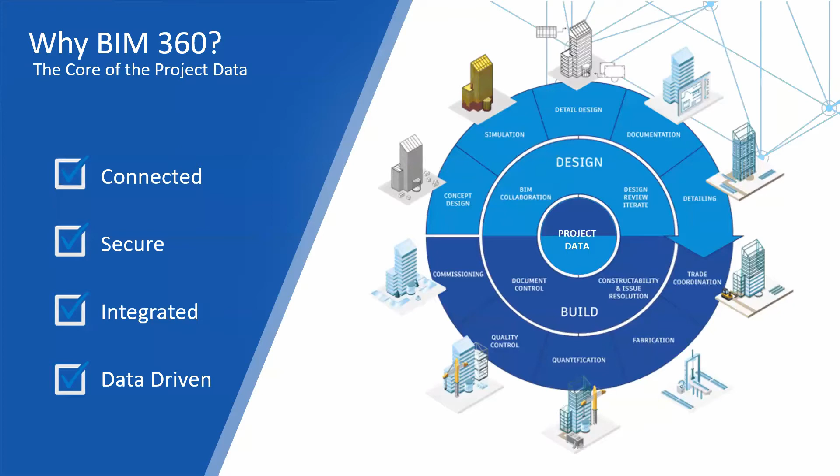As you can see on screen, it's a good representation of the BIM 360 ecosystem. Everything basically works off and is pinned on Autodesk Forge. That's a proprietary programming and coding language that all of the platforms have basically been redesigned from the bottom up to allow integration between the different BIM 360 products. On top of that base, that foundation, sits your data. All of your project data, your communications, all of that is basically going to be set in that central repository with which everything is going to be able to access it from.

So data silos are basically, as much as they can be, a thing of the past, and all of your BIM 360 platforms will basically work off of BIM 360 Docs. So as you can see, you've got your design and your pre-construction, which is what we're going to be discussing today, and that is going to be pulling the required information from the same data. Also connected to that is your ops and field execution software, BIM 360 Field and BIM 360 Ops.

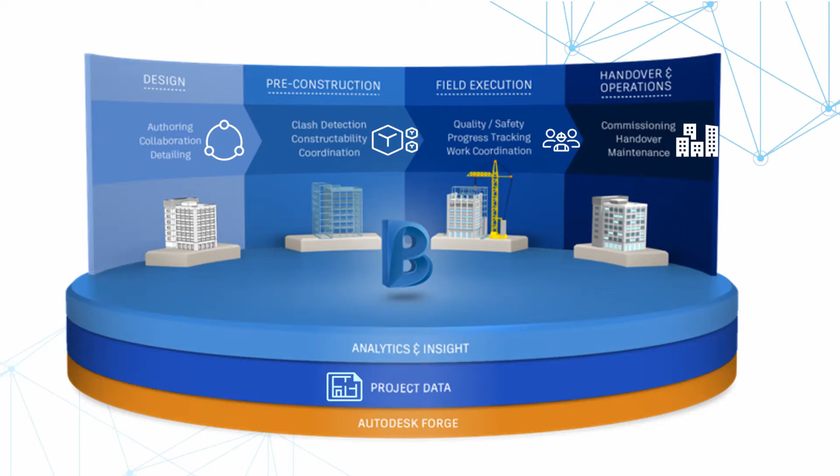Another graphic basically showing where it sits in the ecosystem. So as you can see, in terms of administration, BIM 360 Docs is the basis. Everything else ties into that, and we basically have all of our project access, your member access, your member administration, and your project administration, as well as account admin, handled through BIM 360 Docs.

BIM 360 Coordinate will basically handle your verification of your authored models, which would have been done by BIM 360 Design. So it'll basically interrogate those models vis-a-vis clash detection and work off of the same data.

That then feeds back to BIM 360 Docs to get you your insights and your project home, putting you in a position where it can feed you project-specific insights. As you move further down the road with BIM 360 over the years, all of your projects feed into a business level insight, which is always valuable. As opposed to what currently happens, your project data, once the project is finished, literally sits on the server just in case you need it at some point in the future.

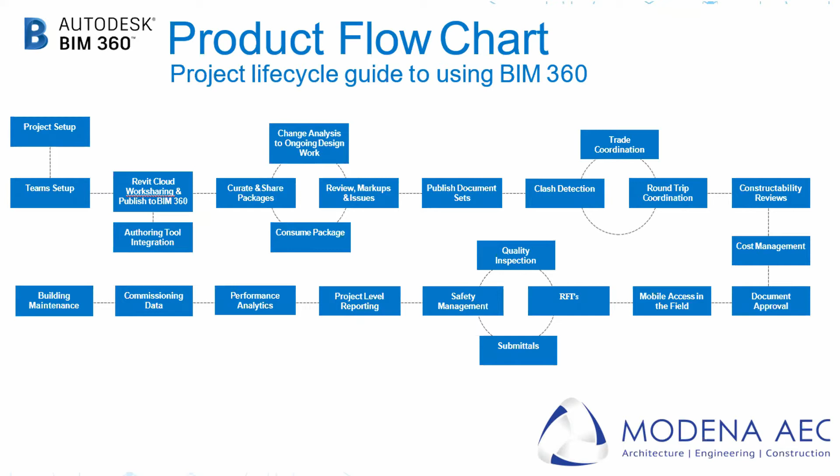This is basically an overall high-level indication of the product flowchart life cycle for BIM 360. So trade coordination sits somewhere here, and your design authoring using collaboration sits here and feeds in. In terms of your 3D model, for service coordination and clash detection, we obviously need to deal with the 3D model, 2D models and 2D drawings basically fall by the wayside. Up at the top right, all of your platforms are going to feed into your capabilities to service the project to the best of your ability.

And again, BIM 360 Coordinate will basically service you in this area here, as well as your trade coordination, your clash detection, that sort of thing.

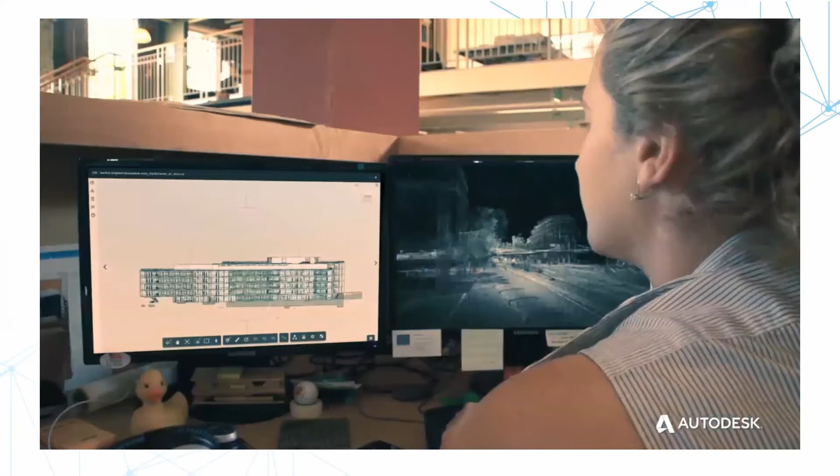Today's design and construction projects require disparate teams to collaborate closely so they can complete projects on time and on budget. But with distinct teams come data silos and disconnected communication. Autodesk BIM 360 removes these barriers with a single platform that connects design and construction processes and project teams in one place. BIM 360 Coordinate speeds the coordination process between contractors, designers, fabricators, and trades so they can identify and resolve problems between participants before construction begins, saving time and money.

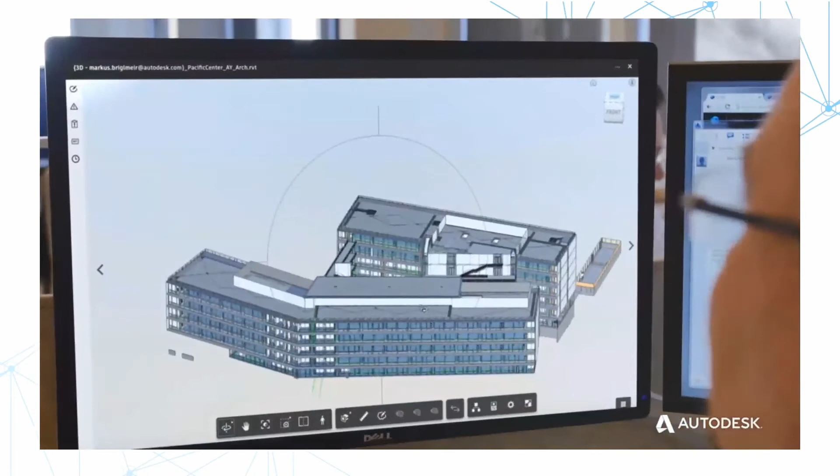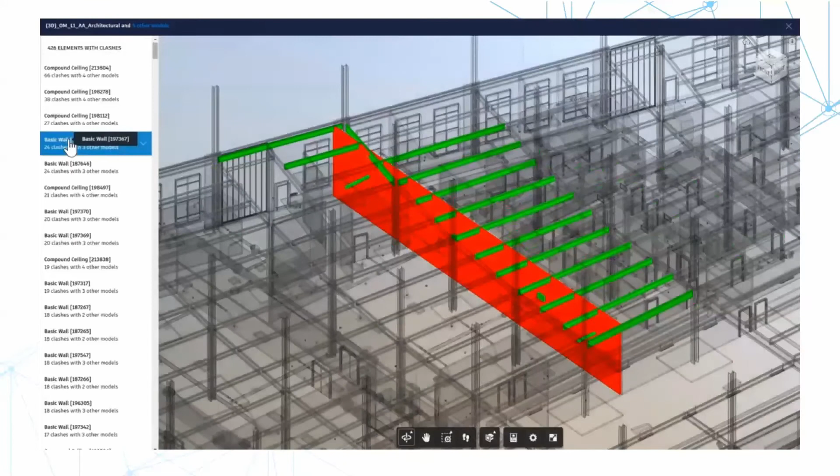With BIM 360 Coordinate, teams can merge models in the cloud to accelerate constructability reviews on and off the job site, navigate aggregated models, and toggle visibility to hide and reveal model components. Get clash results immediately when new model versions are published and drill down to clash details. Create issues from relevant clashes or tag clashes as not issues and assign reviewers to improve visibility into what issues need attention quickly. Create multiple coordination spaces to encourage design and trade partners to experiment with options and develop their work-in-progress models while clash checking them against models shared by other teams.

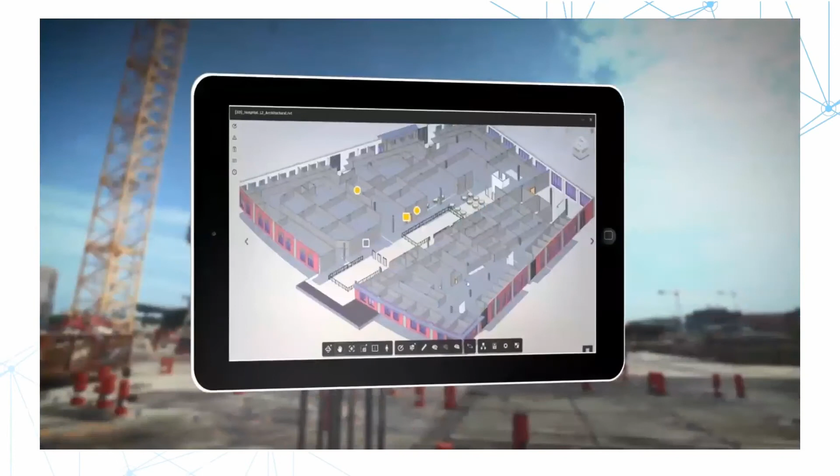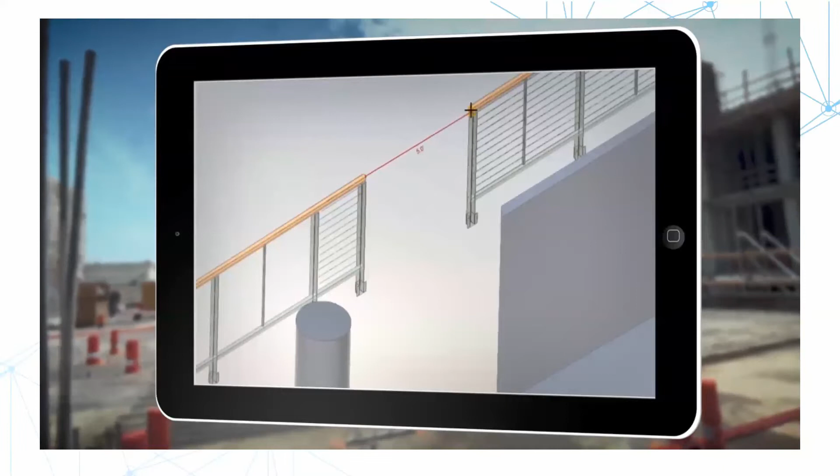With the support of more than 60 file types, including IFC files and offline model viewing, team members have access in the field to needed information on their mobile device. Coordination is put into the hands of the entire project team, democratizing specialized tasks and letting multidisciplined teams take responsibility for the quality and accuracy of their content in real time.

BIM 360 Coordinate is part of Autodesk BIM 360, the only cloud platform that connects design and construction teams, processes, and data to inform decision-making, improve outcomes, and accelerate project delivery. Experience the power of a connected project. Try BIM 360 today.

Okay, so I thought I'd put this in. Not many people are aware of some of the numbers out there, and some of it's actually kind of scary. With respect to service coordination, why it's so important, a little bit of Googling and you'll see that fewer than 1 in 3 contractors, that's 30%, believe that they finish projects on time and within budget.

In the US, they have the ability to do this kind of statistics. Over $15 billion a year is spent on rework. That's a big chunk of money.

Costs that would contribute to that include things like labor, and one that a lot of people, myself included, often forget, the plant required. You need cranes, you've got to move them, that sort of stuff. Materials that are ripped out and the materials that need to be replaced also obviously cost money, as well as time spent going through these clashes. That's obviously time lost, time you could be spending doing other things.

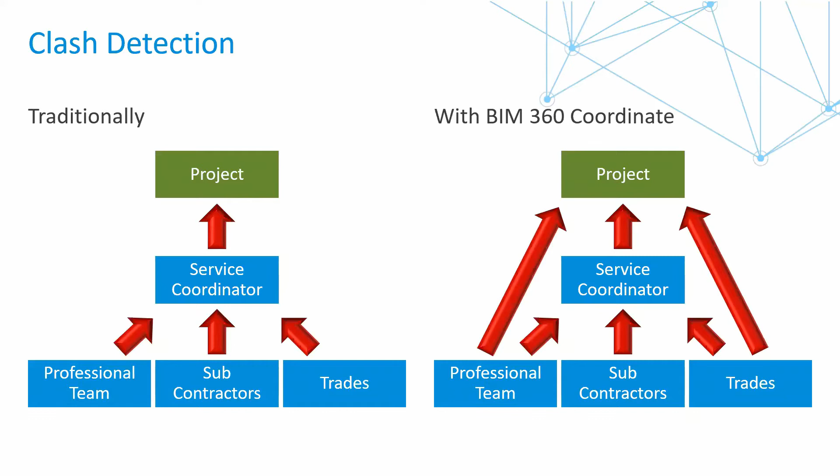All right, so we're going to take a couple of videos here. With respect to general navigation, as you can see here, what I'm doing in Revit is making a change—fixing a clash. Can you imagine maybe a duct or something goes through there? I've chosen to do an opening because it's a lot easier to see.

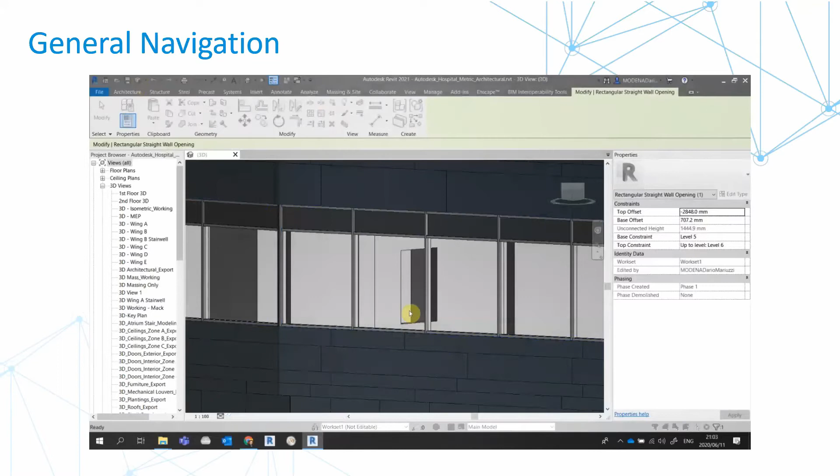You're able to basically look at a clash, eventually make the change, and then synchronize it back. In terms of how BIM 360 Coordinate is used, you can basically use it in various numbers of ways. In this case, I've chosen to clash the work-in-progress models, so from day one I'm able to clash those. You're also able to clash models that are put up for review—if a model is approved for public use, you can go ahead and clash those.

The process that you follow is slightly different, but not all that much, so it puts you in a position to be able to do this quite easily. I'm doing the little bits and pieces in Revit that I need to do right here, and waiting for that to be pushed up to the cloud.

Again, this is cloud-based—it is centrally located data, which basically means once it's up there, anybody who's been given permission can access it. So from a security standpoint, prying eyes are a thing of the past. Permissions need to be set up.

Over here you can see I'm in BIM 360 Documents. You saw there that the architecture model's basically just running through its updates—it's pushing the data through, refreshing it for me, and putting me in a position where I can now eventually access that data and start looking at the progress of my clashes.

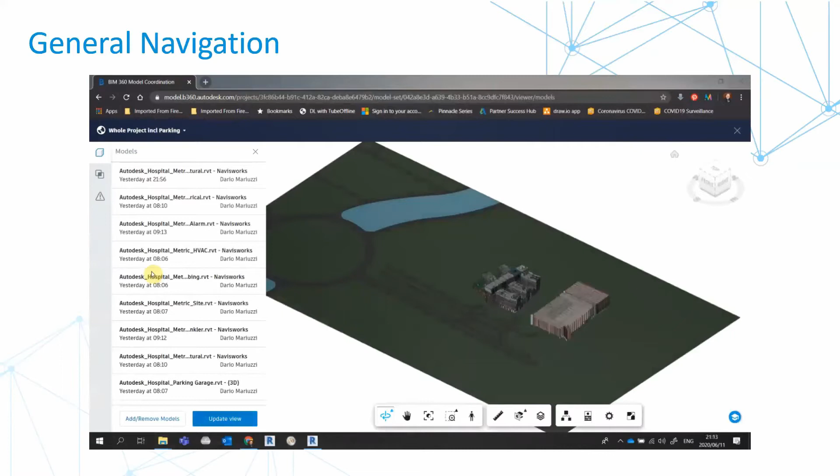So you can see all of my models on the left there. If I need to, I can go and remove a couple—maybe I added one or two extra. Easy enough to get through. Again, I'm not deleting them, I'm just basically not using them for the purposes of clash detection.

Notice how smooth the interface is—it's a 3D model that I'm navigating through a web browser, mind you, so no special software. If you were looking at a model like that in Revit to that level, you'd need a pretty decent machine. I can have any machine that has internet access and basically take a look at that 3D model.

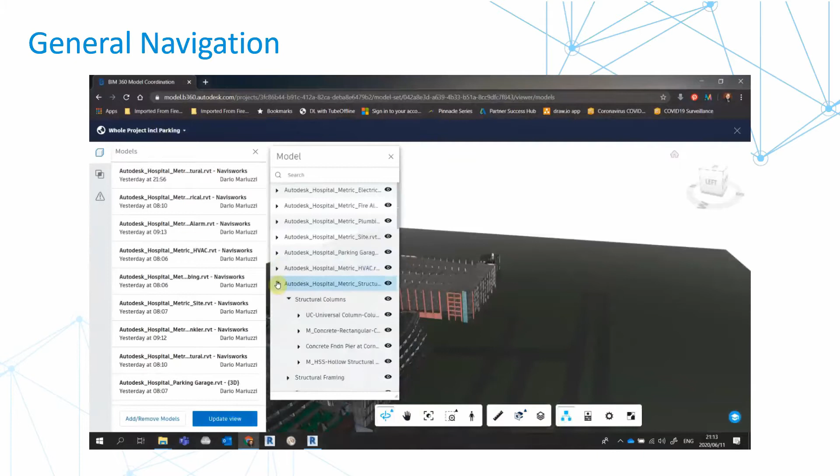Federated 3D model, that's every service. I'm able to basically look at getting things that I don't need in terms of my view out of the way. So you can see I've drilled down to basically just the models. From a model standpoint, I've chosen to hide the parking garage that you see.

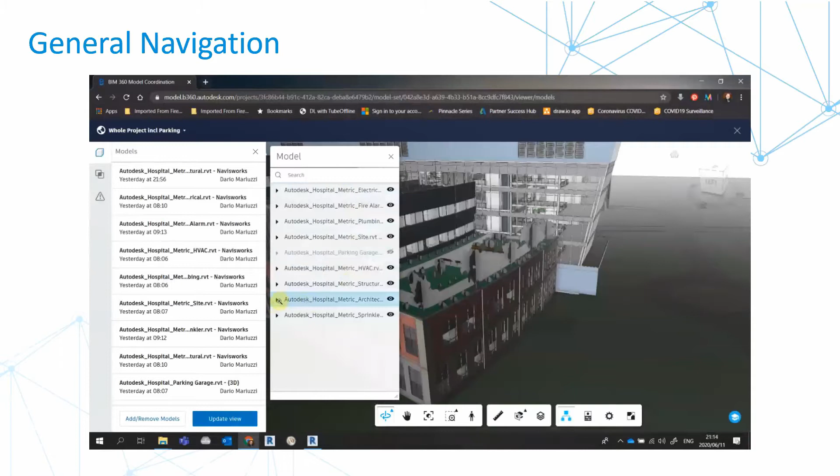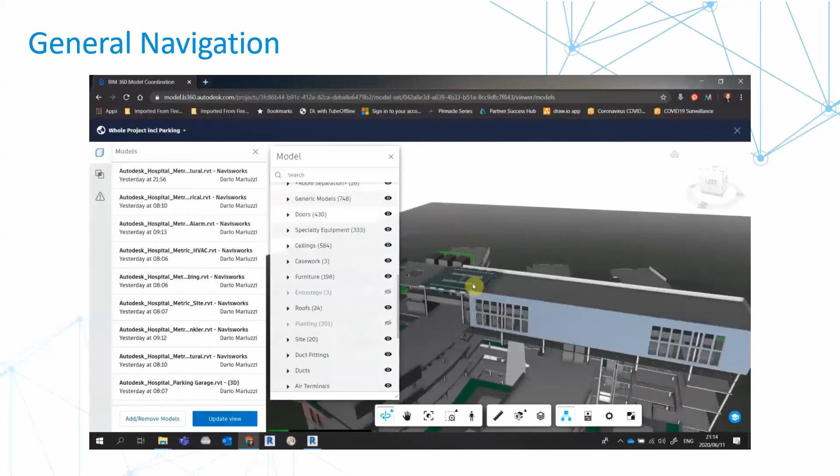It ghosts it, which is quite nice because I get to still view it in context. In terms of service coordination, all of our trees and entourage, that might not be something we need to take a look at, so I'm gonna switch them off. I'm able to switch off at a model level, hide things at a category level as far as Revit's concerned, and hide things at an element level should I choose to do so as well, which is quite nice. So there goes all of my entourage helicopters I don't need for service coordination at this point.

Notice how smooth the orbiting is. I'm able to orbit, take top-down views, exactly what I was able to do in Revit, in AutoCAD, pretty much working the same way. You can see there all of my ducting in my ceiling spaces are there. I'm able to grab elements and do what I need to with them.

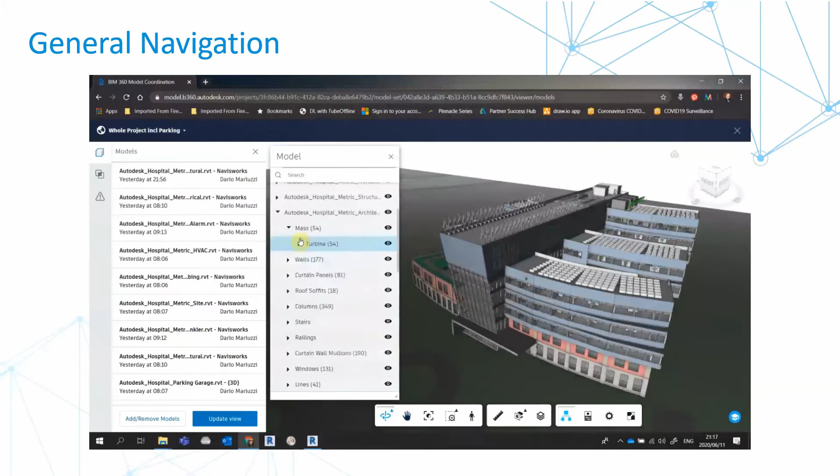Very, very fluid, very, very responsive. Now, the reason I've asked you to take note of that is our mobile devices are going to be brought into play a little bit later on.

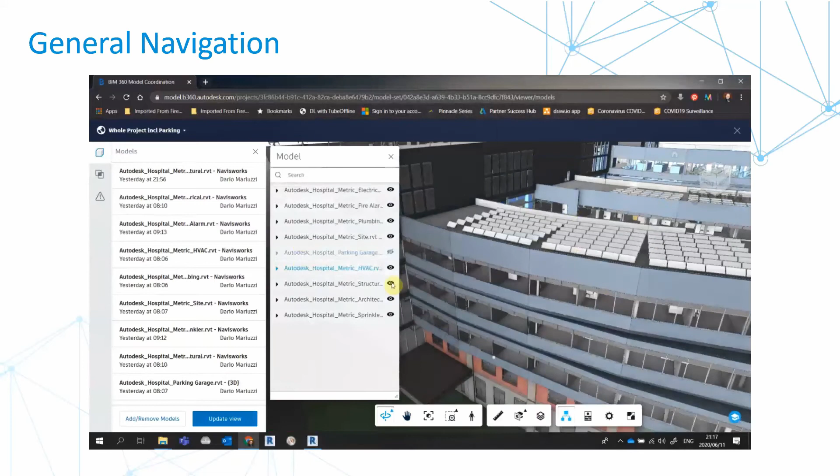Highlighting a model allows you to look at it, so you'll see the model as you pan in and out in context. So you'll see the structural model, you take a look - there's the structural, and immediately it refreshes with everything else around it, basically putting me in a position where I can quite rapidly, quite easily view things in context.

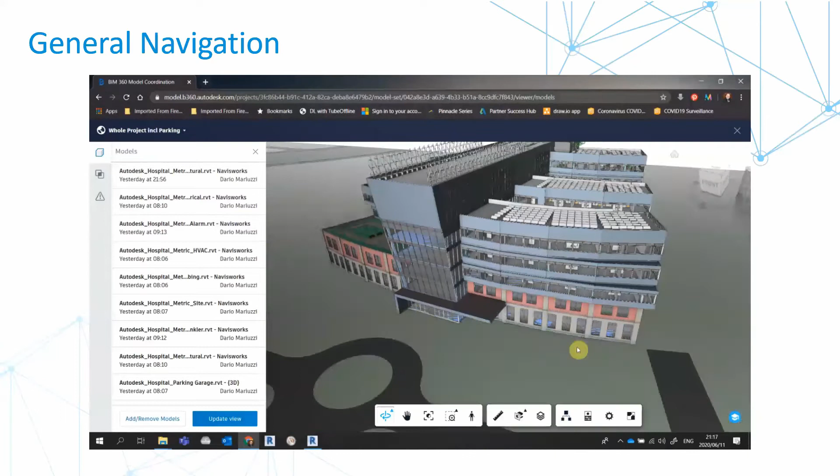In terms of navigation as well, a whole building gets kind of difficult, so common practice here, we might decide to go level by level. And what's nice is as I hover over my levels...

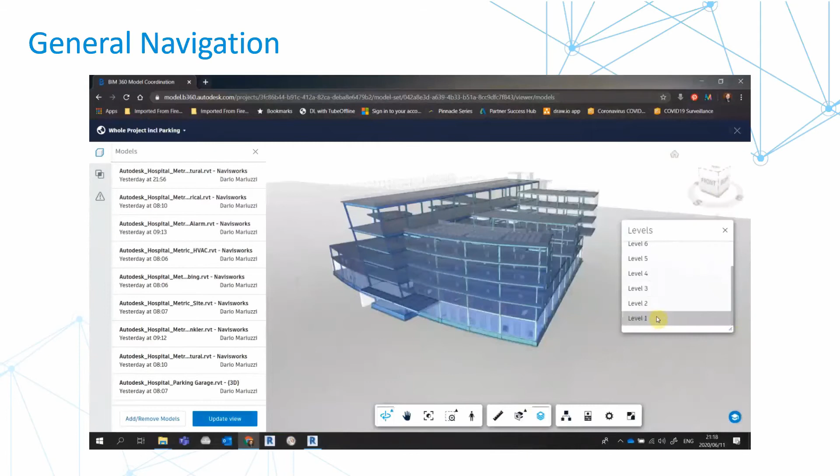You'll see that it actually gives me an indication of roughly where I am. So before I make the selection, which as you can see will basically drill down to that level, you can actually view your project level by level should you need to, and then of course navigate in and do what you need to do.

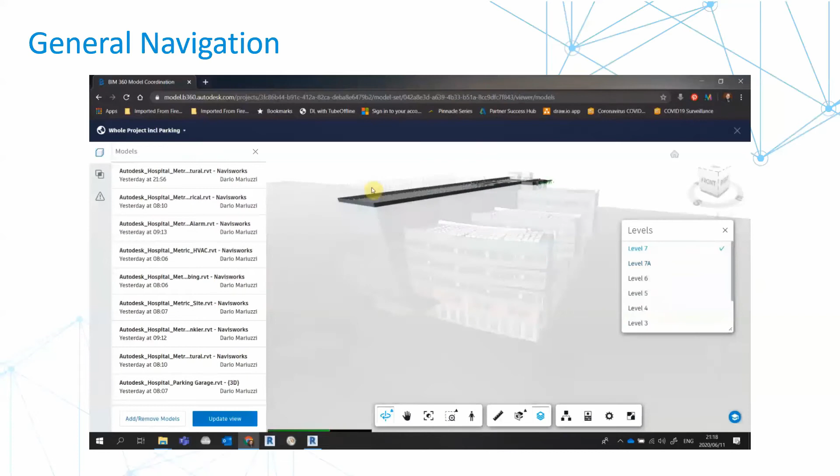Okay, so it highlights that. If I move off that little toggle there, see eventually it'll disappear to show you just that. So again, I've got my context and then it basically removes it from sight. Individual element selection is of course paramount - I need to be able to figure out what things are, which we'll demonstrate in a couple of seconds. But again, very, very fluid, okay?

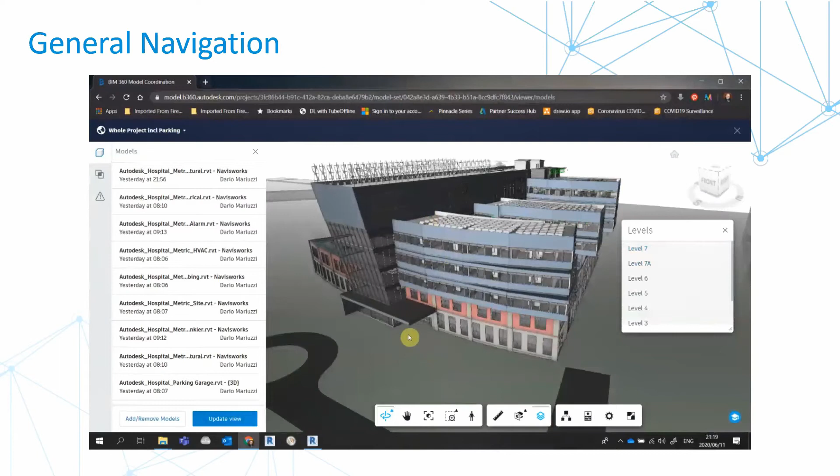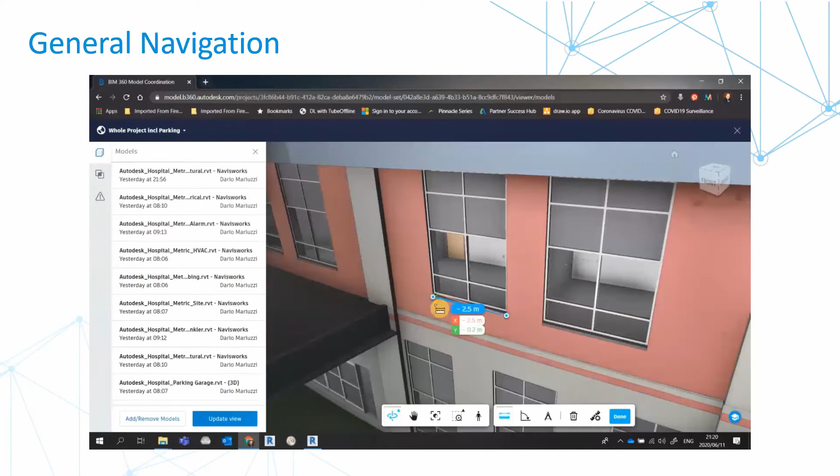You can see with respect to the model as well, I might need to have a look at data or interrogate the model a little bit. So let's take a measurement real quick - click, click, and the job's done. Or in my case, if you can't find the endpoint, I'm able to see things there like, whoops, okay, settings, switch that from meters to millimeters, and I'm on my way very, very quickly. So I'm able to tweak and adjust.

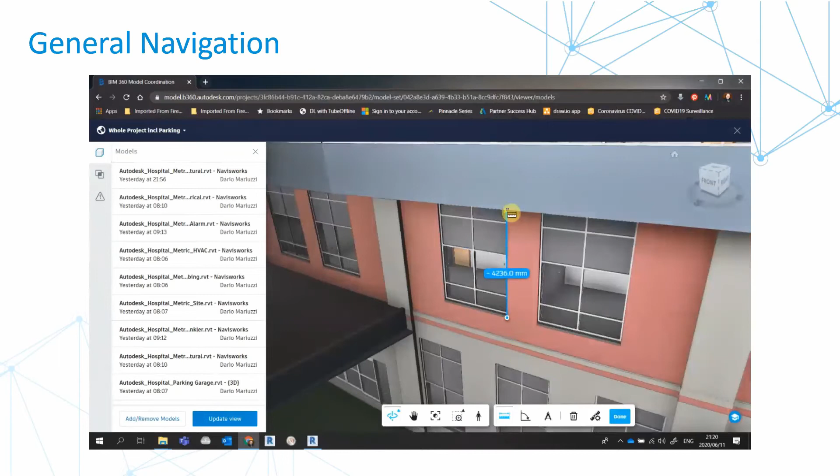So working with teams in other countries, maybe you're working in imperial units of measurement and you need the metric. Obviously, they're drawing in imperial, you just convert to metric and you're getting those metric measurements. So no calculators and slide rules.

In terms of how things look as well, I just want to draw your attention that BIM 360 allows you to change how things are looking, which we'll get to in a couple of minutes. But we need to worry about our plan, our building vertically as well.

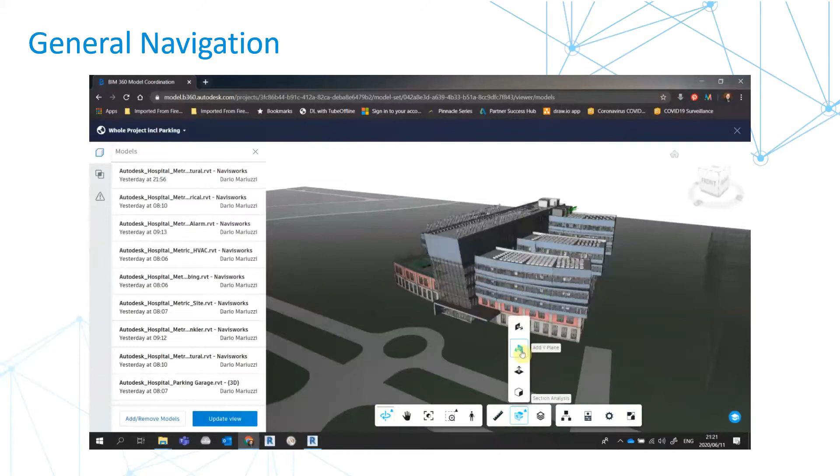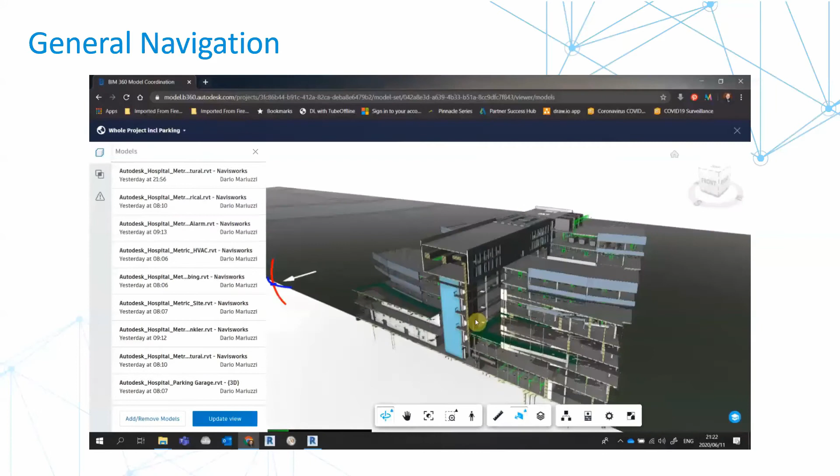It's great that I can do it floor plan to floor plan. In terms of sectioning, I can set up a single or a combination of more than one section to basically start boxing portions of my building off. As you can see here, it's as easy as just dragging the section gizmo and zooming in, out, tilting, panning. So position, and you can see there are two axes that you can basically take and rotate, just like you could if you were using Navisworks - it's all pretty much exactly the same. Very, very responsive, you can see the refresh in terms of the data is quite quick.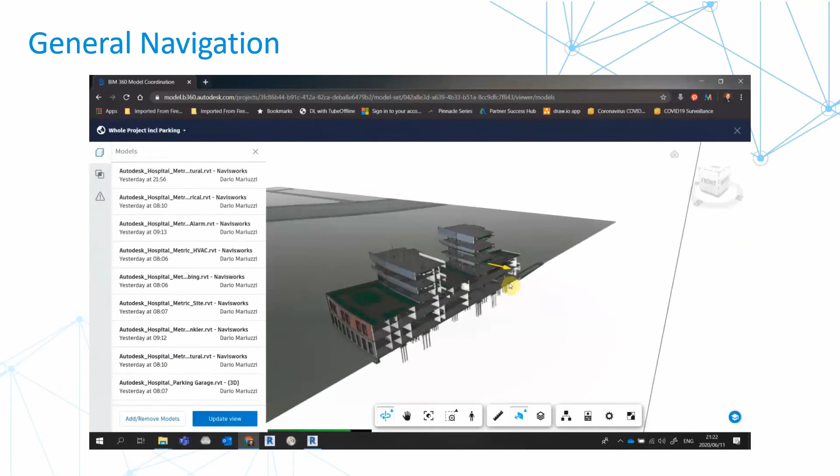And let's take an opposite section. It would be great to see what my atrium's doing, so let's take a look in there. I've got some equipment over there, some cores and lift shafts that I've got to worry about. So moving in, let's go and have a look at a specific wall.

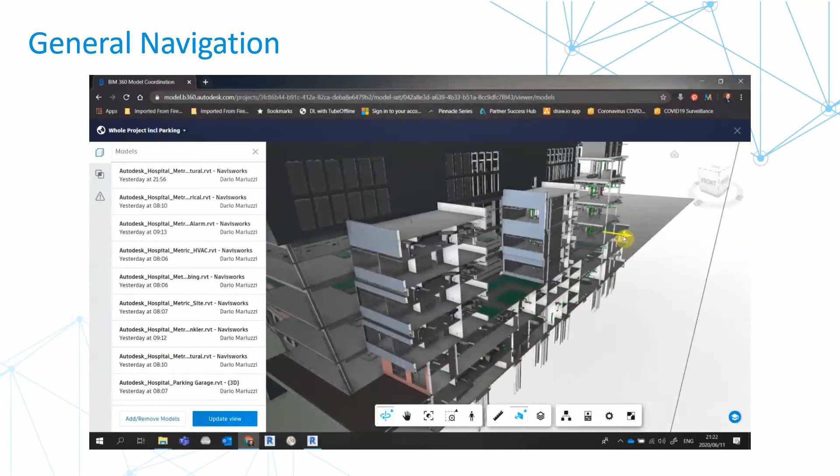Now, the reason I've done this is you'll see the wall down here now, where my cursor was. So I'm looking over here, basically. You can see that that opening hasn't adjusted yet—the model is still busy uploading. So we'll give it a couple more seconds, but that gives us a little time to discuss a few more things. So off we go with the sections.

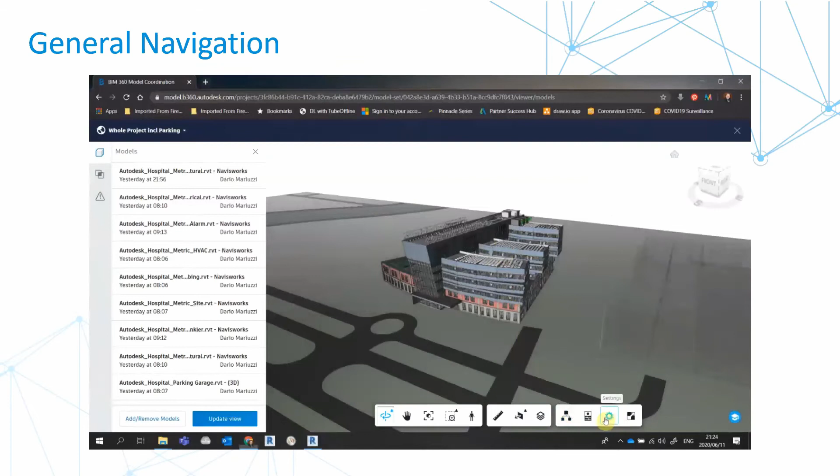And we're basically going to start looking at certain things. Now, remember I asked you to note how fluid it was. In terms of a presentation, this is pretty slick. If I needed to show this model, it's quite polished.

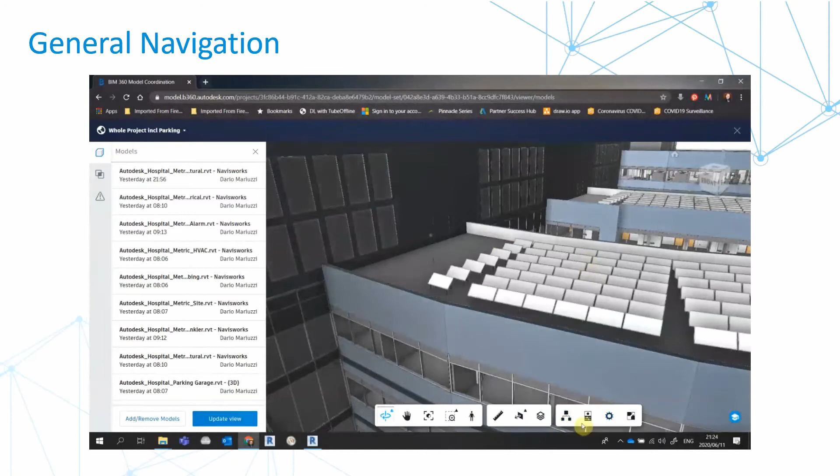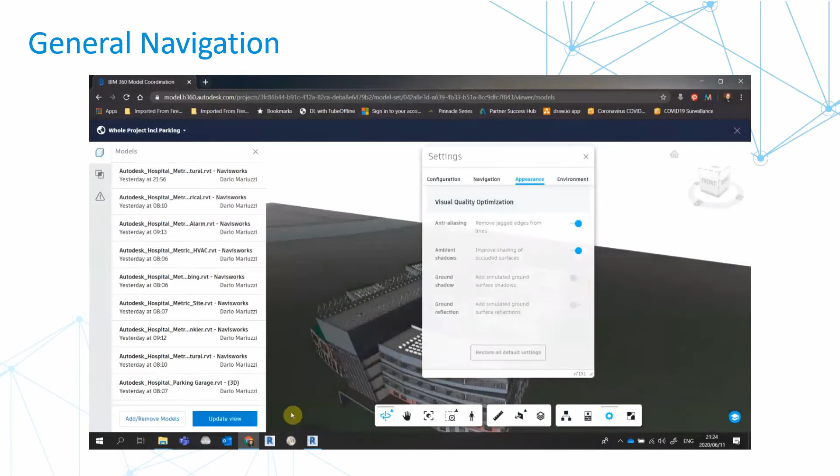I've got, in the act of navigating, things like ambient shadows on. Now, as you know, from a Revit standpoint, playing with shadows is quite a dangerous thing in terms of system resources. I've had them on all the time, so I can switch them off and on. You'll notice the top of that slab is now not showing ambient shadows, and over here the shadows of the solar panels were actually showing. So I can toggle those on or off, and that's obviously going to make things a little bit smoother.

And believe it or not, there was a setting that actually sped up navigation, which I forgot about. You can see there, it provides faster, smoother navigation—I actually had it off. Despite that fact, it's actually quite smooth.

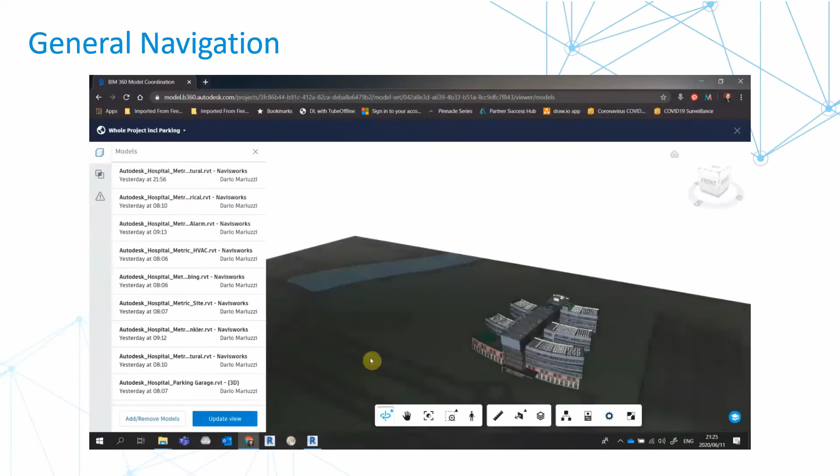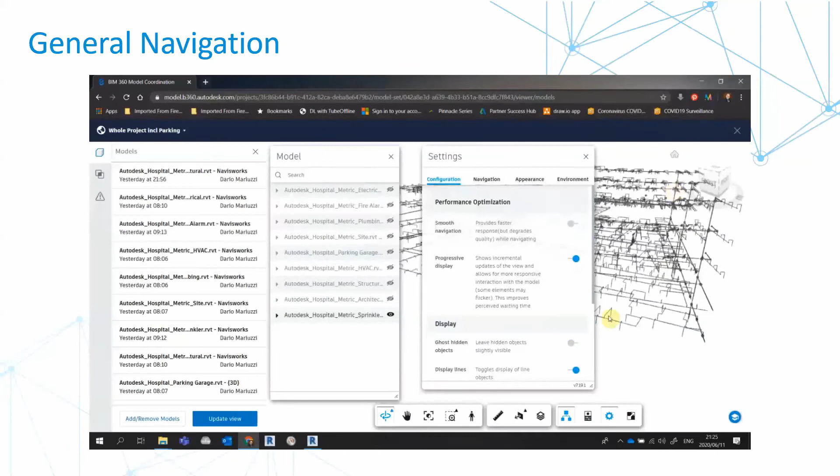In terms of the models, with respect to how things are hidden, I can also choose to actually hide things, or hide them in context. So that's basically where I've headed now—I've left the hiding context on. You can see I've chosen just to show my sprinkler systems, which has a foreground sort of appeal, and everything else is almost in X-ray mode. If I toggle that off, it actually hides them completely, and I'm able to look at my sprinkler systems standalone, not in context.

All right, so I'm going to go ahead and reverse that, except the garage, of course—don't need that at the moment. And then I'm just going to move things around. So this is all movable across multiple monitors. It's going to be gangbusters with this.

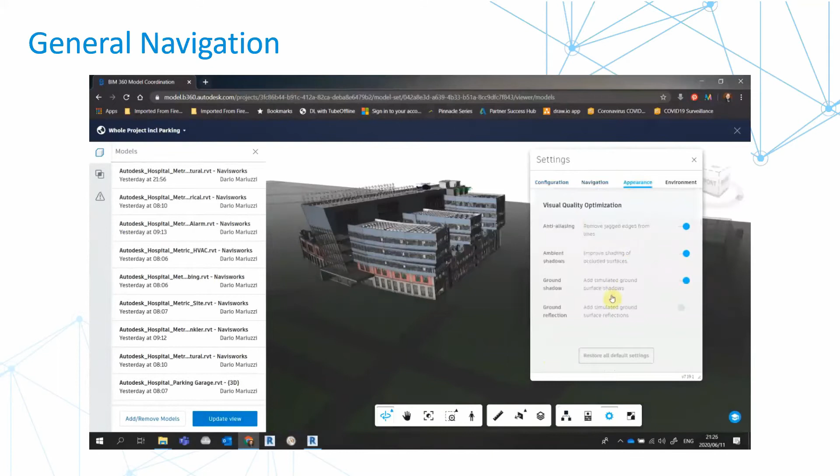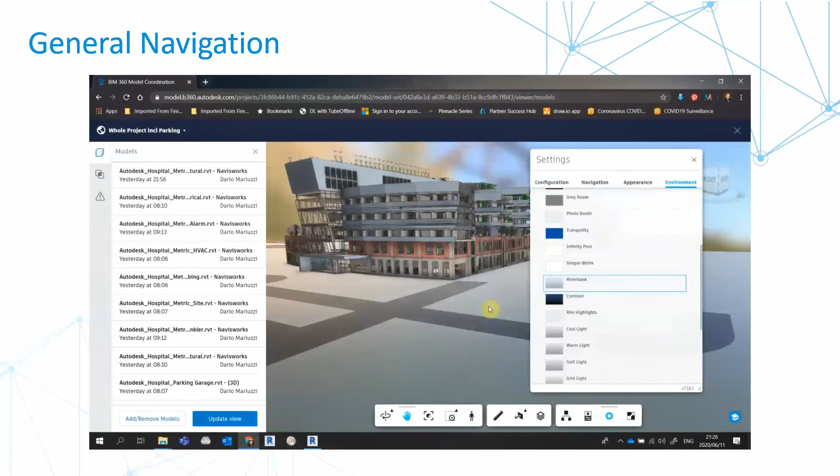In terms of appearance and environments, you can start seeing, with respect to changing them out, if I'm looking for a different graphic quality, I'm able to use any one of the presets on the fly, and it changes them as and when you need. So I think one of those was the Tranquility one that I chose to use—well, which one was that? I can't really see... oh, Riverbank. All right, so I'm able to basically change the appearance as and when I need it. And again, look how responsive, okay?

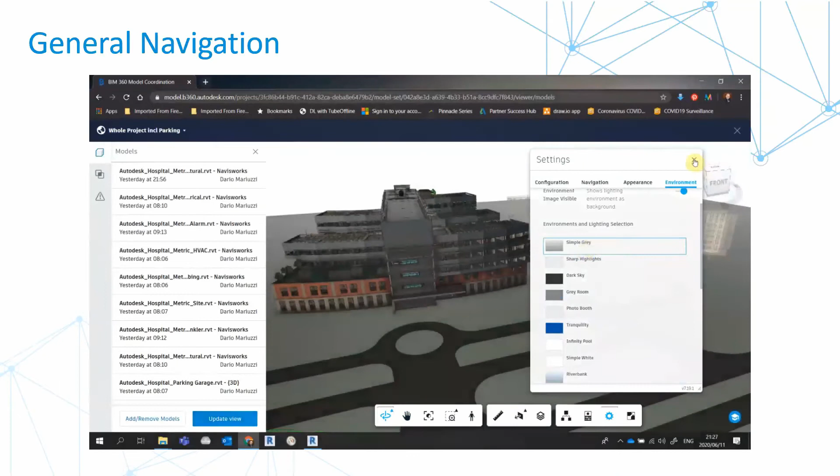It's not that I've got to wait another 2, 3, or 4 minutes for authoring software like Revit to basically repopulate, especially towards the end of the day when the computer's taken a big knock. So I'm able to pretty much have all of this versatility at my fingertips.

Let's start looking at things like elements. So you can see there that that opening may not have changed yet, but let's take a look at the elements.

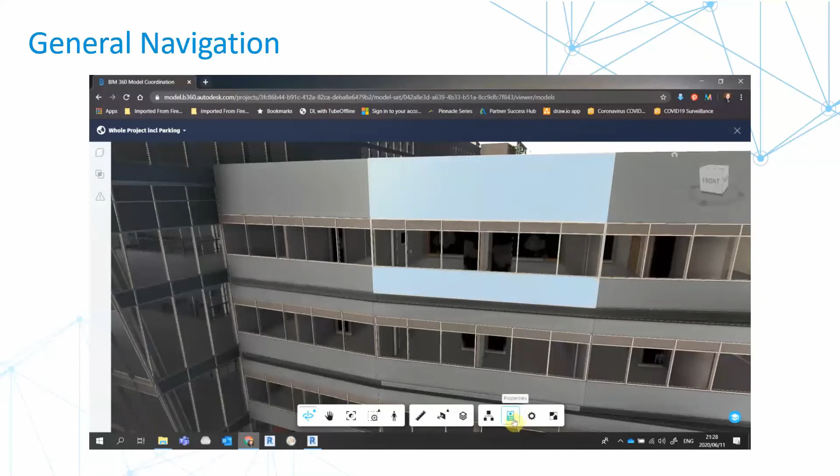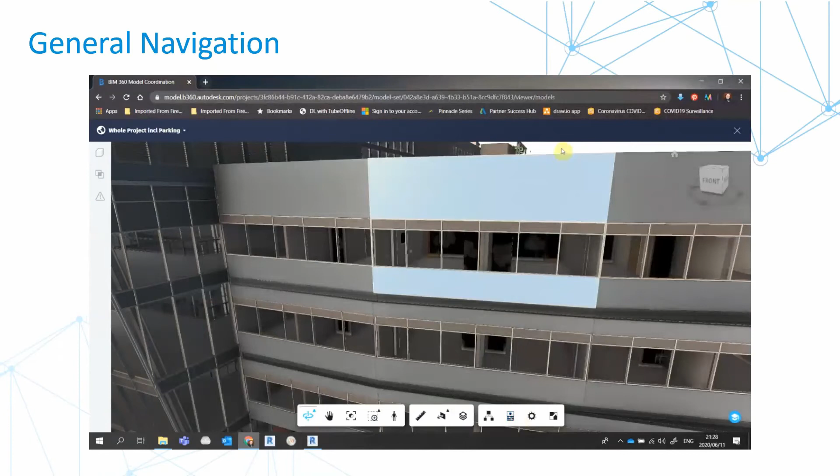So I just grabbed the wall. Notice the heading—it gives you a nice little digit behind it. That, guys, is your Revit Element ID. Which means what? If I needed to change that wall or modify that wall in terms of a clash, I don't go and grab the wall next to it. Using the element ID gets me that wall. So changing the wrong thing is a thing of the past—fantastic thing for somebody like me who can't really remember all that much.

Okay, so I'm just going to close this down real quick and show you how the refreshing of this will work in terms of your clashes. So remember that opening we saw right at the beginning—we're going to go check to see whether our model is refreshed. Okay, looks like it's there. There's no circle of death going on, so things are good.

Let them push up quickly. And I'm going to head back to my whole building.

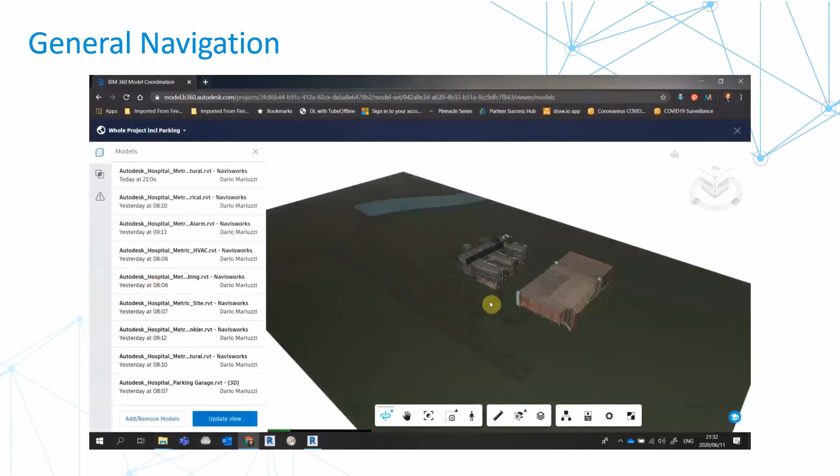So that whole building is basically a federated model - everything, the model from the architect, the model from the structural engineer. In terms of clashes, looking at the thing as a whole is going to get us to a point where, just to let you know, there's the opening, looking nice and substantially bigger than what it originally was.

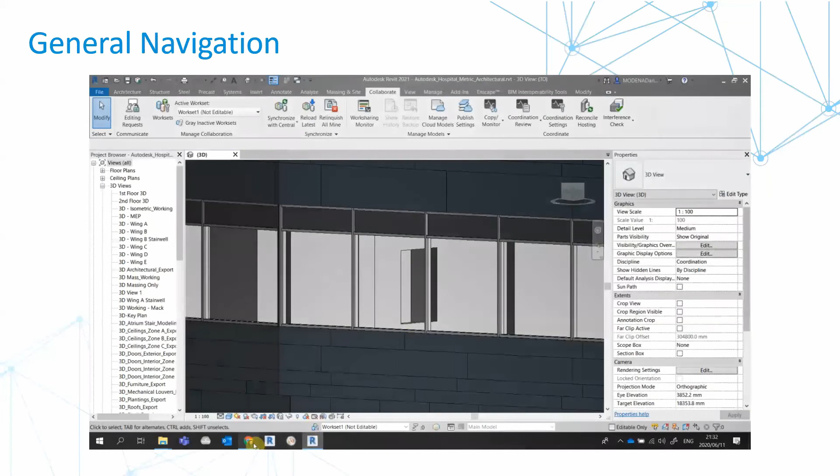So as I was saying, in terms of clashes, it's going to put us in a position where you potentially have to have a look at the entire building's clashes. And that can be problematic - 15,000 clashes straight off the bat will turn anyone screaming for the hills.

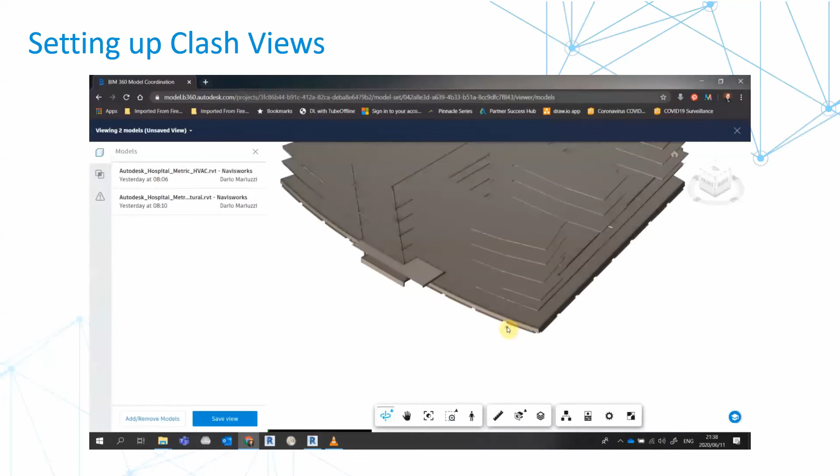So we'll take a look at setting up views for clashing. Now, one of the things I really appreciate about this is, even though I decide to clash, say, the structural model versus the plumbing model, which I've done here - actually this was structural versus HVAC. I've chosen to do two models, and you'll notice it's a lot quicker. It's a lot less data that you need to worry about, which is fantastic.

And again, I've got the same functionality as you saw with the entire building, the same speed. Simple as picking the model you want, and basically doing what you need to do in order to get it sorted out. So in terms of setting these things up, it's literally seconds to set up the views that you are going to use to clash.

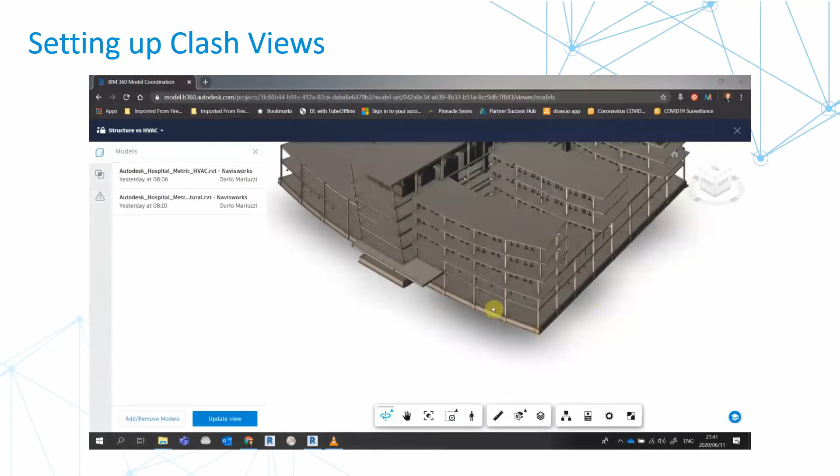And if, like me, you type slowly, that might impede you slightly, but that's not the computer's fault, that's my fault. All right, so with respect to that, you can see that the view is saved. I have the opportunity to update that if I need to rename it for whatever reason.

And again, this view has been set up for HVAC and for structure, so the HVAC engineer and the structural engineer can use it. You'll notice that floor, I've clicked in clashes, is showing that there are clashes. You'll notice the floor below it down here is actually gray because I've already done to this floor what I'm about to do to this, which is to basically mark it as not being an issue.

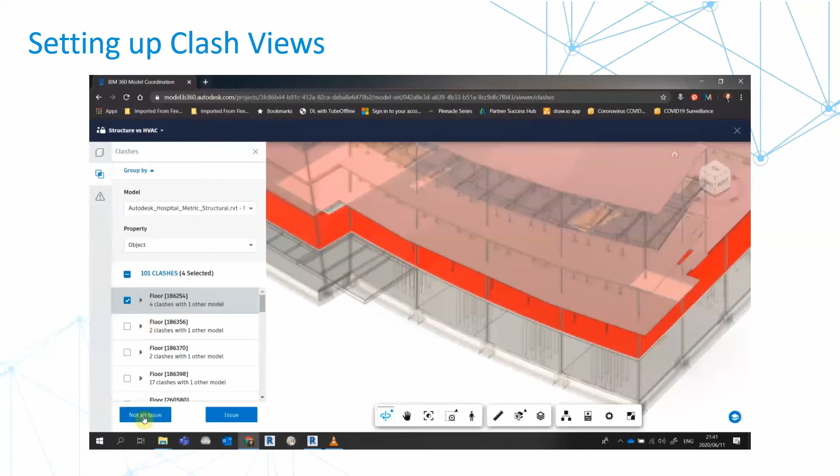We may not be modeling penetrations for our ducts and the like, so basically put a note in there, capture my data so that I can basically get things done. And I can mark these as not being a clash.

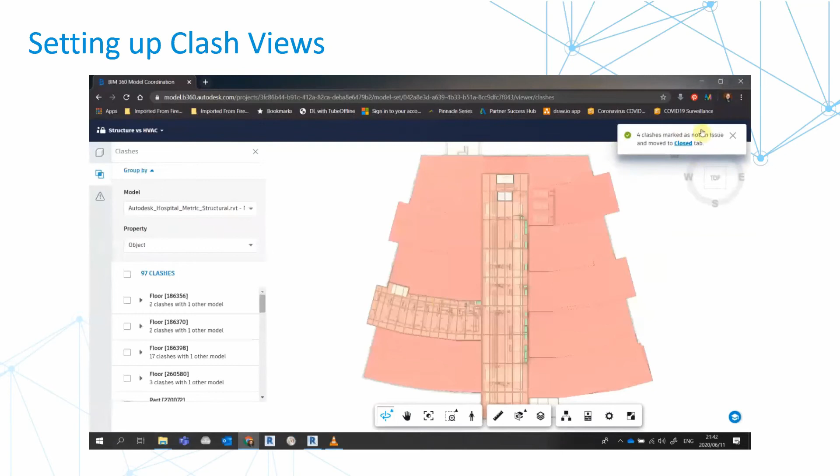So I have the opportunity or the ability to decide what is important and what isn't. So you can see there with respect to the interface, first of all, that floor is now grayed out - obviously not something we're going to be focusing on, and it allows me to systematically go through the model.

Moving on to the next floor, I can actually go and see what the situation is there. And that'll allow you to basically, simple as that, whittle down a lot of clashes quite quickly.

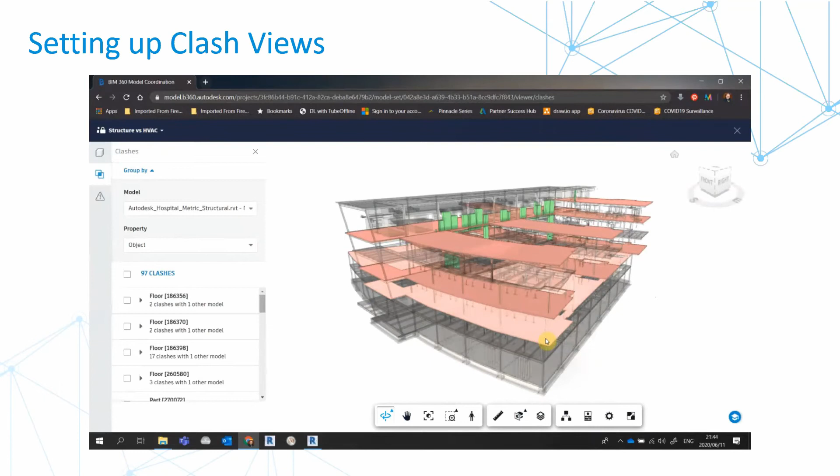So, the ability to track a clash - you're going to go through this process and get your model down to the 6,000 or 7,000 clashes that you need to worry about, and now we need to start worrying about those. So how we go about it is this way: we're going to go to our clashes again, and we're going to take a look at a clash.

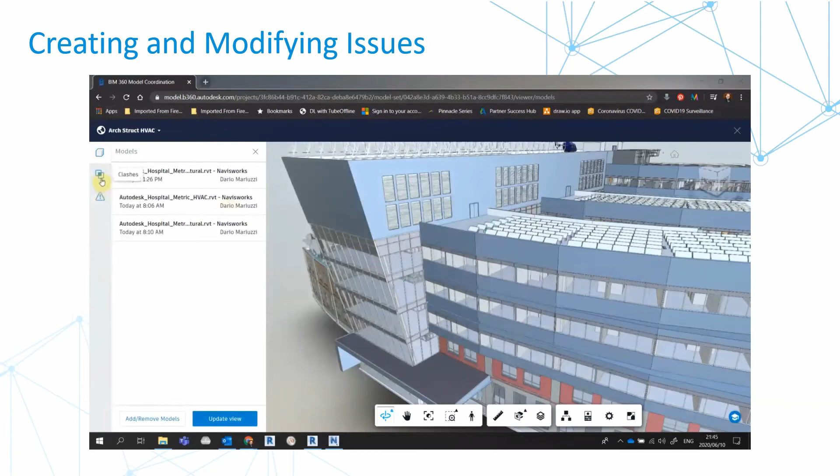So that wall will basically give me a few clashes. Now this wall I have actually worked on, so I've done some of the clashes. I haven't sorted them all out yet, but you can see that it will tell you that if that element is still clashing with elements, it'll still give it to you as a clash, and not necessarily elements in the model you've chosen to do clashes on.

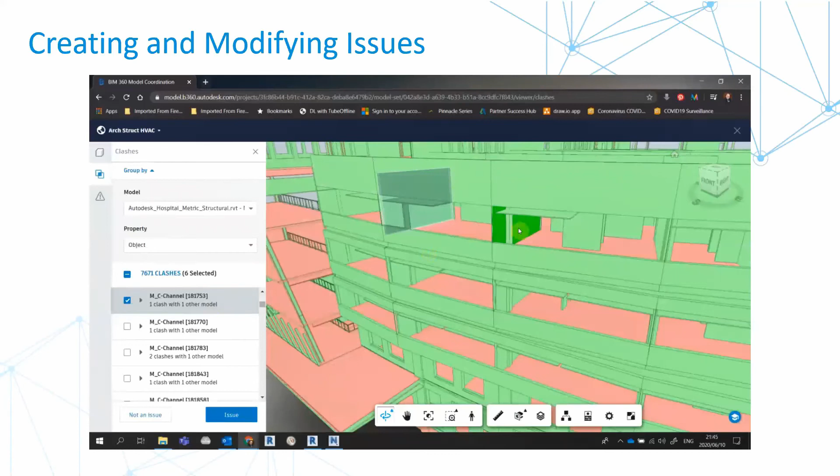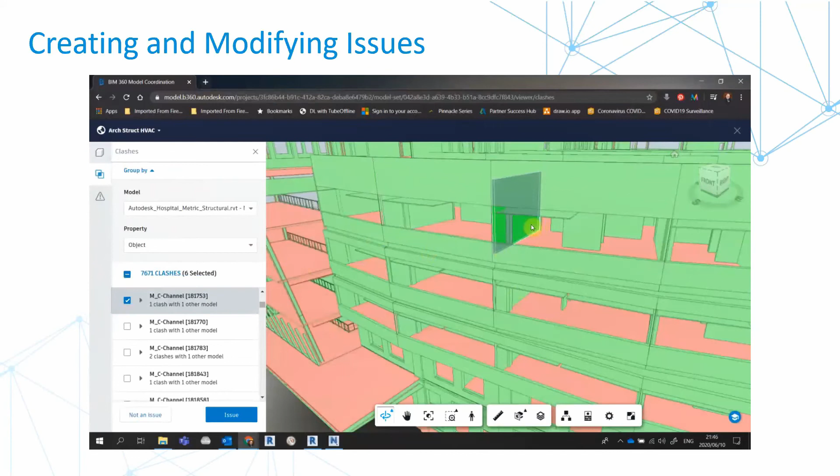So it's not just going to work with the models that you've set up. In the case of the previous one, it would have been HVAC versus structural - if a duct is going through a wall in the architectural model, I do need to know about it. So it will basically group all of the clashes, and if necessary, load the models in that aren't loaded in that you need to see.

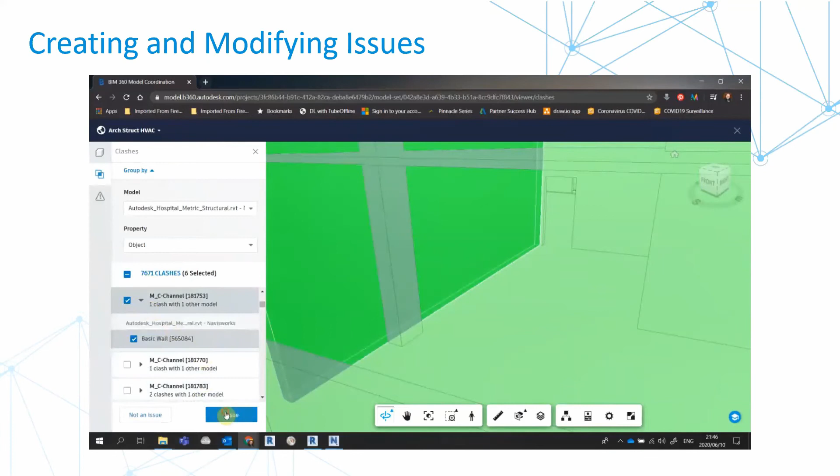So once we've decided on a clash being important, we basically will make an issue of it, and that issue then starts becoming traceable. Your clashes are always going to sit in the model unless you basically state that they aren't clashes. So you'll go through and interrogate that, or you'll basically make them an issue, in which case now we need to start doing certain things to that in order to move it down the process, which is to basically, first of all, create the issue.

We need to assign responsibility to that, maybe give a little bit of a description. What you're looking at on screen is going through the motions of that, and you can see it's quite quick to set up. It's just capturing a little bit of data to help everybody else in the team. If permissions and security have been set up, everybody has the ability to take a look at these issues. So if you're on leave, a teammate at the office can take a look at stuff assigned to you. It's cross-pollinatable to a big extent, and that issue is now done.

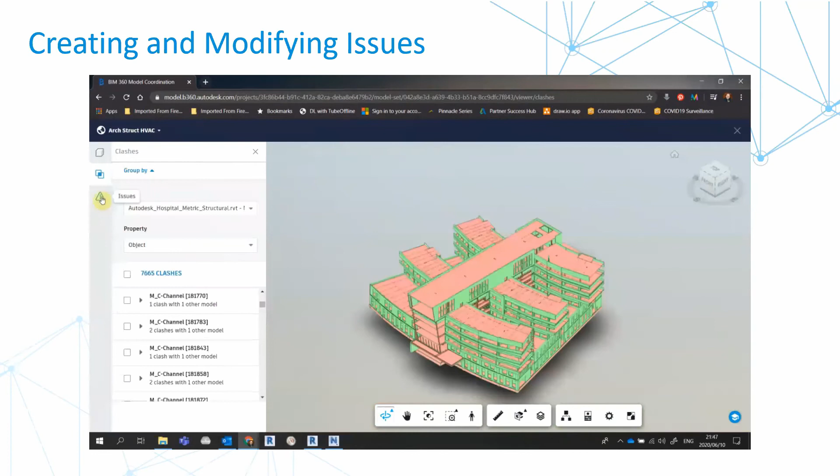You can see there were clashes that were grouped. If you've used Navisworks in the past, you'd have to run clash tests and figure out what a clash is, but the computer helps you out with that to a big degree. BIM 360 Coordinate automatically detects the clashes - these are hard clashes, like a duct going through a wall. Making it into an issue spotlights it and captures data that will facilitate someone actually fixing it.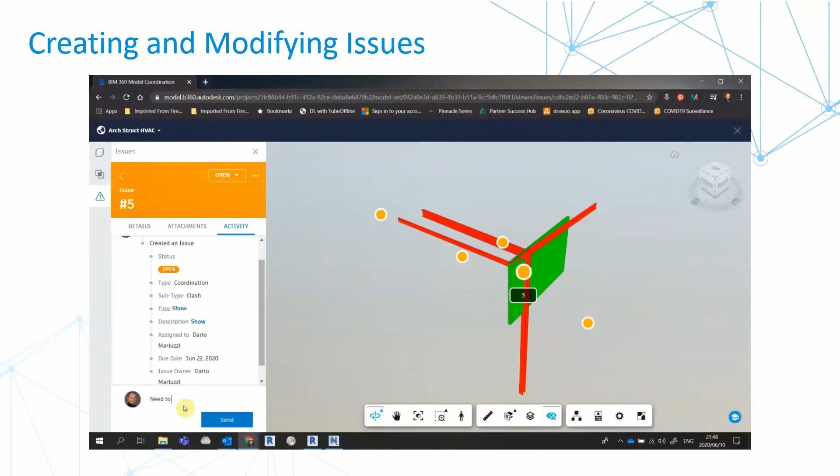So you can see the process of capturing that data, and that's basically done.

So complex functionality that's available almost at your fingertips and almost instantly, which is fantastic to see.

Moving into Navisworks. Navisworks is the mainstay, the big brother in the Autodesk stable of products, and it would be remiss on Autodesk's part to just do away with it. For those of us who use Navisworks, it needs to be brought in and integrated - you need to be able to do with BIM 360 what you've done with Navisworks. A big thing for Navisworks would be getting those clash issues in here.

At this point I want to stress that this is currently in preview for Navisworks 2021, which basically means it's going live is imminent. But this is a sort of look and feel for what you'd be able to expect. The older product, BIM 360 Glue, with Coordinate being the new generation, is basically what we're looking at here.

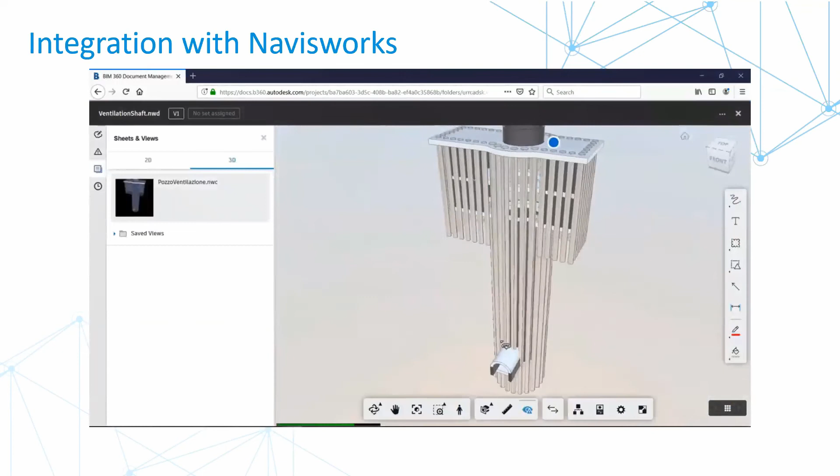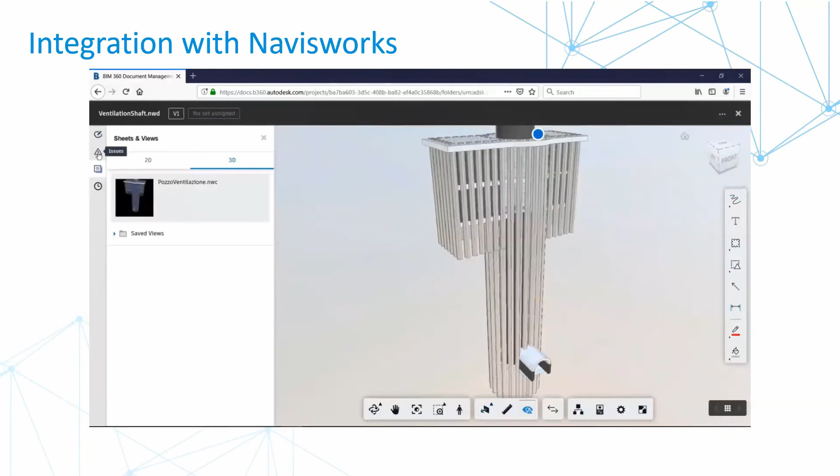Through BIM 360 Glue, I'm actually able to log into BIM 360 Docs, as you can see there - we're in the BIM 360 Docs interface. I'm able to do exactly what I've been doing with the other models. The difference here is setting up the issues I'm able to eventually take into Navisworks. I'll just fast forward here a little bit - you can see the issues there, we've been through that.

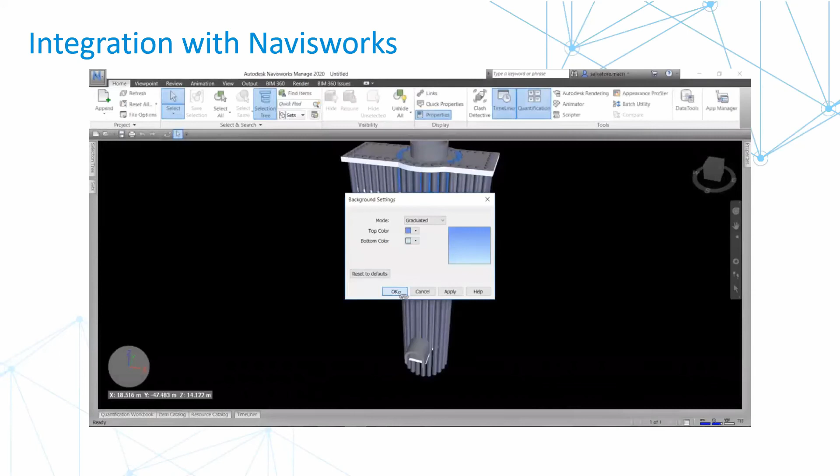In Navisworks here, I'm able to get at the BIM 360 data and bring those clashes, or those issues, in.

As you can see, there's a blue issue over here that they've just switched off - as you can see, there it is. That issue in Navisworks, I'm actually able to manipulate, or will be able to manipulate, and send back. So I'll be able to use Navisworks as a service coordinator to still go through the process and interact with BIM 360 Coordinate. You'll be able to access the models through BIM 360 Coordinate, so any issues I choose to modify, change, approve, or reject, I'll be able to push back up into the cloud for the folks to see. Tantamount to the old Navisworks switchback, but again I'm dealing with a cloud-based model, so all of that accessibility is available to me.

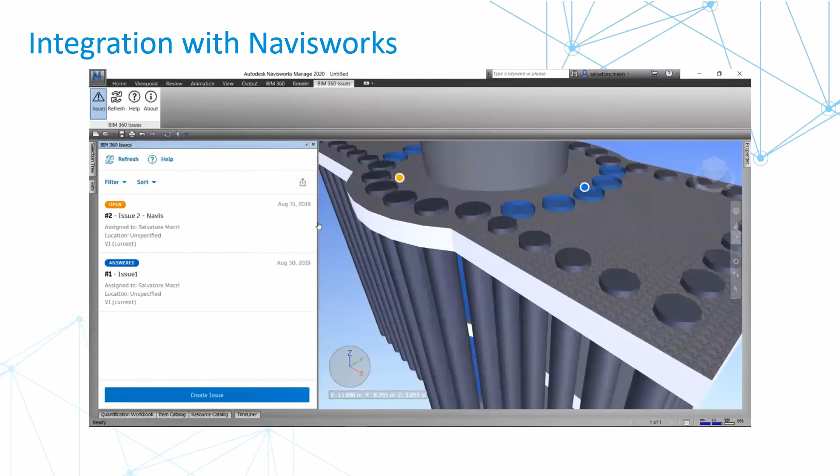So you can see there, the guy's just modified the issue. He's updated it and pushed it back into BIM 360 Docs, and you'll be able to see the issue right then and there - the modified issue, as you can see, it is there.

The ability to go mobile is of paramount importance to teams. Gone are the days of running around with rolls of paper all over the show. Your cell phone, your tablet is basically going to be the new tool on site, which means I need to get access to this data. Now, what data am I going to be able to access?